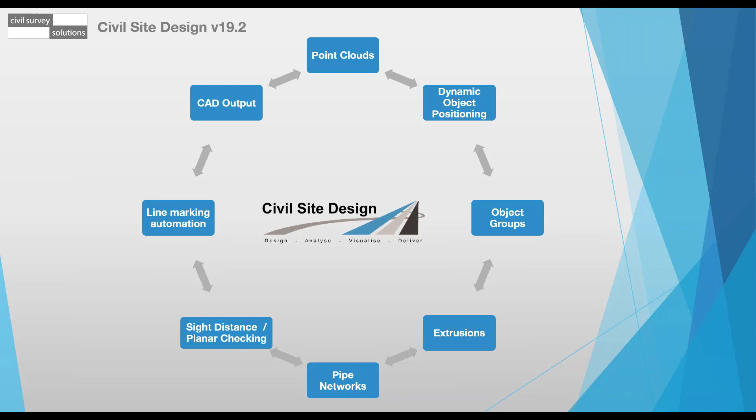Again, much like yesterday, I'll be working on civil site design sitting on top of Civil 3D, and Andrew will be sitting on, Andrew, is it BricsCAD or AutoCAD? I can't remember. I'm on Civil 3D today. You are Civil. Oh, you are on Civil 3D. My apologies. Okay, we are singing in unison then. Excellent. And BricsCAD. The last part I'll do in BricsCAD.

We're spoiling them. Okay, so really, I guess in a sense the platform isn't quite as relevant today because we're not doing too much in respect of string design, but nevertheless, at least we've got a bit of contrast between the two platforms.

So what I'm going to do is fire up Model Viewer. Now I have to remind myself whether or not I've got it already open, and I'm going to make sure I've got a clean screen for you guys. There we go, we're going to fire up Model Viewer. So this is a job that's already been worked on. Obviously what I'd love to be doing now is parking Model Viewer onto another screen and working with it there, but due to constraints we can't really work like that.

The first thing I'm going to be focusing on for you guys is objects. If you haven't used objects before in civil site design, this is a great opportunity to see how they work, but also see the changes that have gone into inserting them and how they can be used later on, which is something Andrew will show you, to actually give you blocks and CAD output within the drawing environment. What I'm going to do is pop over to the Objects tab. Now there are other additions and changes to some of these other tabs, and Andrew will talk you through some of the content, particularly in toggle display. I'm going to go over some of the base updates to things like objects, extrusions and pipes.

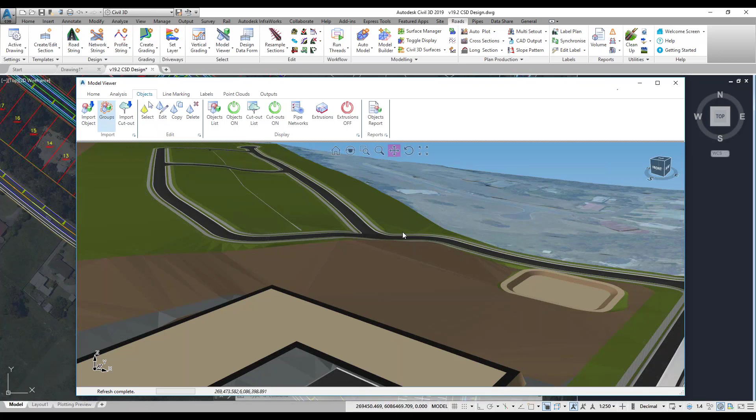So currently, if you haven't seen objects, the idea is that we are able to bring in OBJ files and have those placed within the drawing environment to give you some context for your design. Now what I'm going to do is click on the Import Object button. In fact, what we'll do is make Model Viewer full screen. And Jonathan, with the new objects, we also support 3ds files now as well. So OBJ and 3ds, yeah. Fantastic, thank you. I'm going to go to the Import Object button and just do that again. My apologies. Oh, that's interesting. Okay.

I'm going to go to the File tab. I'll mention this briefly, but the default folder location is the visualization folder found in your Common 10, and the populated content in here, particularly the signs, has actually been added to in this particular release. This has come through something called a visualization pack, which I'll come to shortly once I've shown you how this works.

The folders actually contain some of the base imagery information that goes into making up the OBJ file, so I don't really need the folders. What I'm going to do is go to the warning signs, ignore the folders for the time being, and come down and pick - you can see there's a lot of content we've added in. There's a huge sign library that the team put together to make this possible, so there's a vast wealth of signage that's gone in.

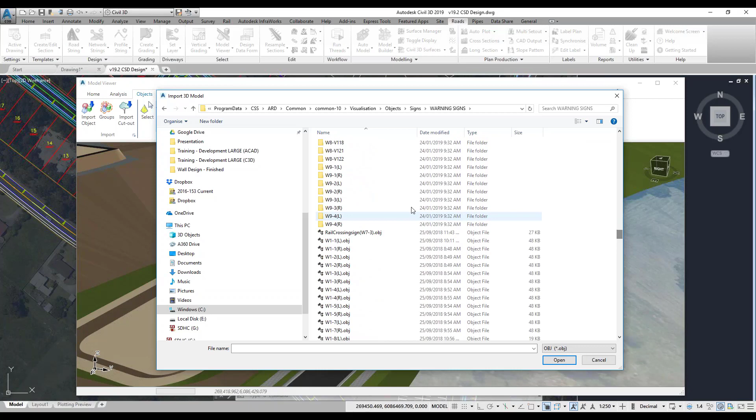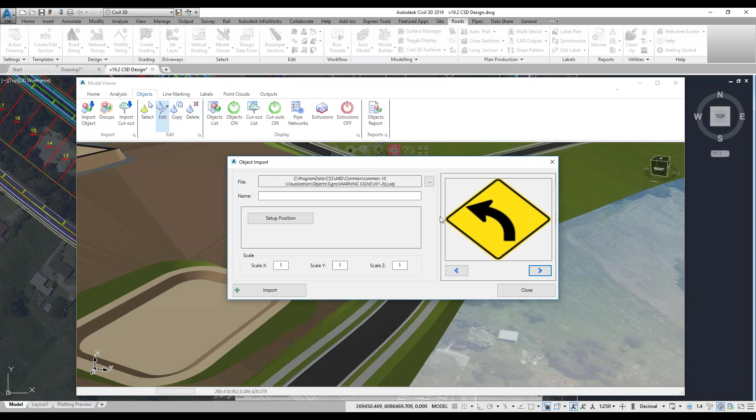We'll just pick the first sign, click on open. What you'll get is a live preview of the sign on the right-hand side. The software will actually read the folder and continue to preview other OBJ files related to that folder. So if I hit this right arrow button, as I'm scrolling through, the file path name is changing and I'm getting a live preview of the sign that I want. So what I'm going to do is just pick a generic one to fire myself through here.

Okay, so we've got a left-hand turn coming up here. Not that we'd be putting this particular sign there, warning of a left-hand turn in this subdivision, but nevertheless it's a good opportunity to place the sign in. So I'm just going to simply place the name here called sign.

In previous releases of Civil Site Design, you'd reference the location of the sign, both horizontally and vertically, based on a click in the drawing, and then a surface was referenced. Quite simple. You can still do that, but we've actually expanded the way in which it can be done.

So if I click on Setup Position, you've now got this form you'll see used in many different locations within Model Viewer. It's a really good form, and because it's such a good form we apply it in many different particular locations within Model Viewer - I'll show you that a little bit later. You can now obviously specify locations, so if you could do this before, you could go and pick a location on plan and have the software just simply place the origin of that particular OBJ file in that position in the drawing environment.

What you can also now do is reference an alignment midway between two alignments, reference a string, maybe reference a code - in fact, that's what we may do in a minute - and midway between two codes. So maybe we want it in the middle of a footpath, for example.

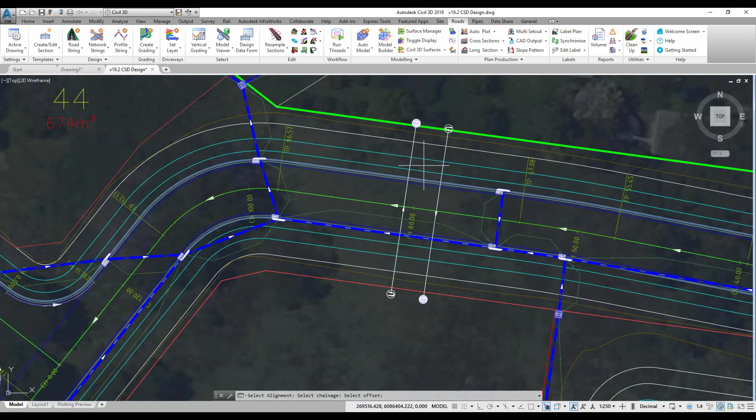We'll go offset. Maybe we'll say, in fact, you know what, reference string, we'll go code. Okay, I'm actually going to pick the horizontal - I'm getting myself sort of caught between which one to do. So what I'm going to do is just go offset. I'm actually going to just manually pick a location. So there we go, 7 meters from the center line.

Now, the nice thing about the angle is that because I'm referencing an alignment, the software should rotate the OBJ for me in reference to the actual direction of the road, which is what I want.

The next part of this is to specify an elevation, which I can type in, or I can choose a string or a code, which is what I remember now I was going to be doing. In this case, I'm going to use that - reference string code and road 1, use the level of the code RFPO, which is basically the outside footpath code.

So if I go and change that, which conveniently I'm going to do in a minute, the idea is that the base elevation of this particular OBJ will change. I'm going to click on apply and then go import. You can see the sign's gone in, based on the position where I've clicked in respect of the offset and the chainage.

Jonathan, sorry, can I just butt in there? Please.

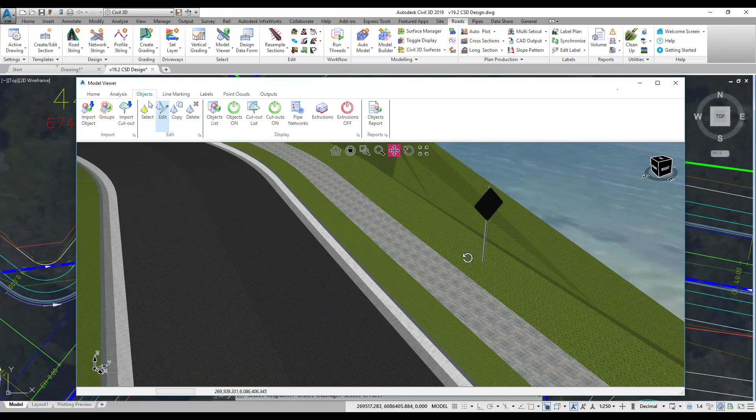On our visualization pack, there are a couple of signs that we realized were incorrect, and we're going to update it next week. And you've unfortunately picked one of the signs that doesn't have an image on it. That was so part of the plan to promote this discussion. So you want to try maybe with a give way sign or something like that.

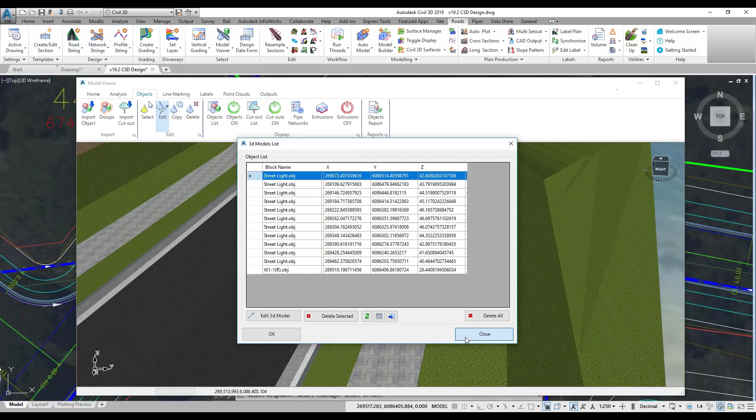Yeah, we'll go edit 3D model. Just so people know, we're supplying a visualization pack, which is a separate download of all of these signs. And we found that of the hundreds, there's a few that didn't come through properly. Maybe we'll cover that if we get time at the end, just to go through the process of adding another one. But yeah, suffice to say that a good 99% of them do actually have the actual image located on them, which is good.

One thing, the purpose of adding this sign in is also to show you how you can really use Model Viewer in your day-to-day design work. The idea being that if I, for example, wanted to, particularly with the new right-click cross-section editing, you can actually right-click on top of the string that you're editing, which in this case is road 1. You can access the

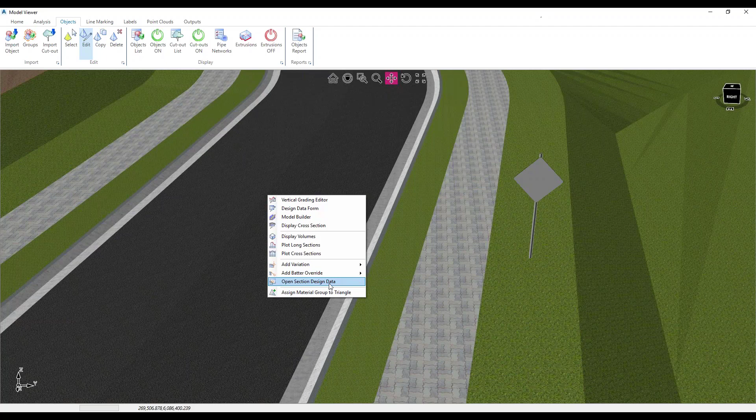design variations, batter overrides, and section data form just by right-clicking in Model Viewer. Now, very recently, since we've had this sort of being beta tested, I found myself with Model Viewer parked off to one side, and I'm accessing the strings and accessing the design data and whatnot and the vertical grading just by right-clicking in Model Viewer. It's a lot more efficient than going up to the ribbon, finding the tool, clicking on the string that you're wanting to edit. This is far quicker.

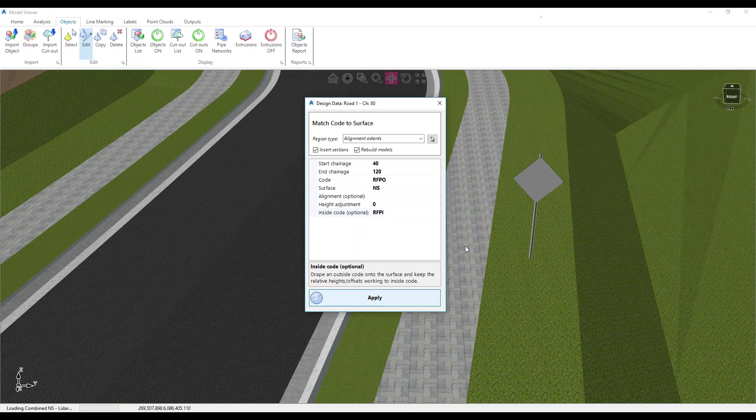and move it onto the natural surface. And I'm just going to use optional inside code here. This is basically saying keep the existing slope between the following sections maintained. So I'm going to go RFPI. Click apply. Then the idea is that this footpath should maintain its slope, but drop. So you can see what it's done there. There we go. And that object has come down with it nicely.

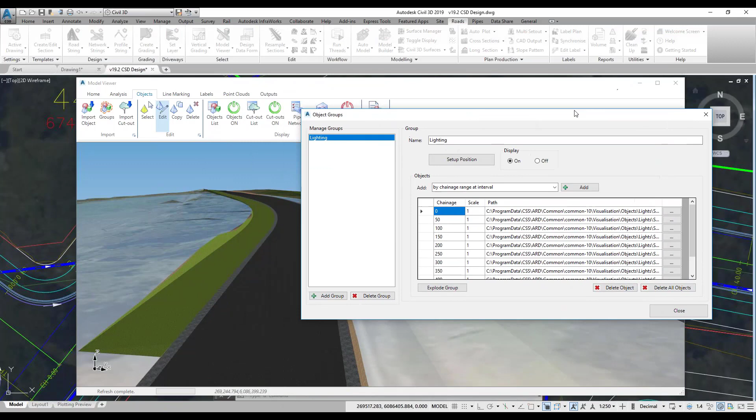So those objects are great, added in individually, but in a scenario maybe where you've got multiple different objects that you want to add in, we've actually got something called object grouping. So if I go up to the groups button, and as soon as I do that, I've already preset this. Okay, so what I've basically said is what I want to happen is for a particular object to be placed at a set interval and reported along, in this case, an alignment.

So I've basically given it a name, set up the position. This position is basically an alignment. So I'm saying, right, I want to horizontally fix the location of this street, all these street lights to be 5 meters to the left of the center line, minus being left, positive being right. And you'll actually see them the other way around because I'm looking at the alignment in reverse. And then I want the vertical position to be based on the right shoulder code. Okay, so again, if that code gets changed later on, the position of it will change.

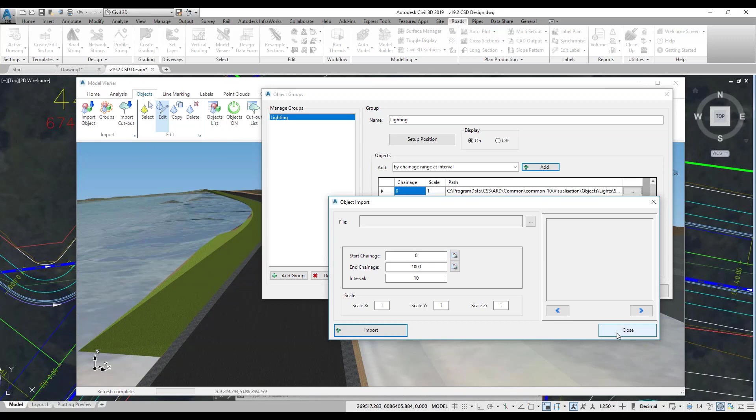We then go and decide how we want those objects to be added, and we can see here that we've got by chainage range at interval, which is what I've used, by sections, or we've got by single chainage. When we go add, it's a case of cherry picking the OBJ file, choosing the start chainage, end chainage, and the interval. Much the same way that we added the imagery, added the object for the previous solution. When we get that, we get it into a little group, which is nice and neat, puts everything together, and it means we can actually delete the entire group as well.

If I click on close, really you should be looking up the road this way. You can see that we've got these OBJs being added in intermittently within that group. Andrew will mention something about CAD output, but this is really great.

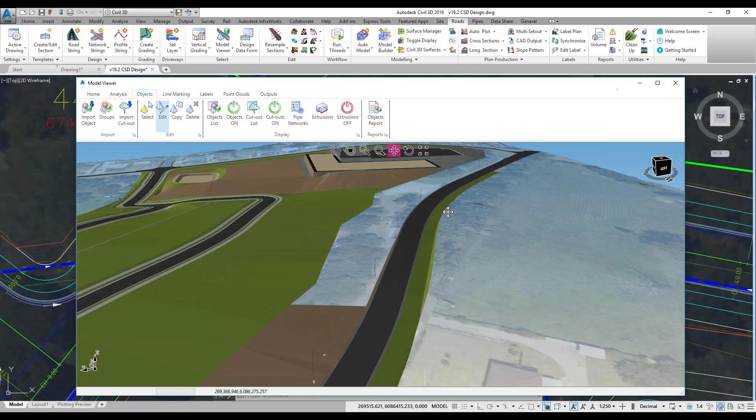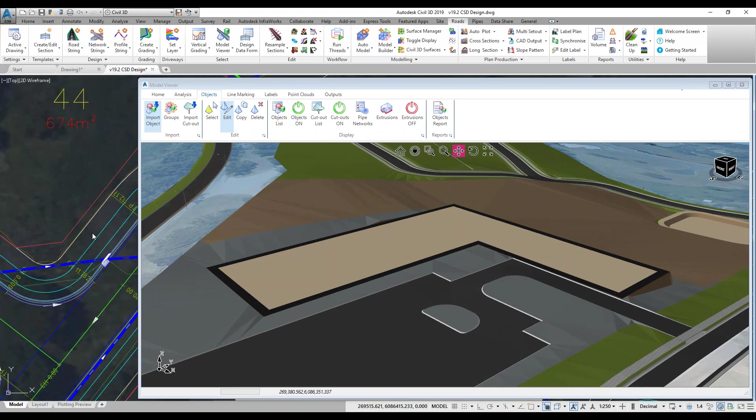In respect of further visualization and giving context, what I've got here, and you probably saw this yesterday if you're on the webcast or in the videos, is a building pad. Traditionally we've gone ahead and created a surface of some sort to give that kind of context, but you don't really need to do that anymore. What I've got in the drawing environment is a polyline.

Here she is, and I'm just going to bring up the properties so you can see. It's a polyline on layer underscore building ext, for extrude, and that's all it is. What I want is to give some context for this building, so I'd like to see that polyline basically extruded. The tool does exactly what it says on the tin and extrudes it into the drawing environment.

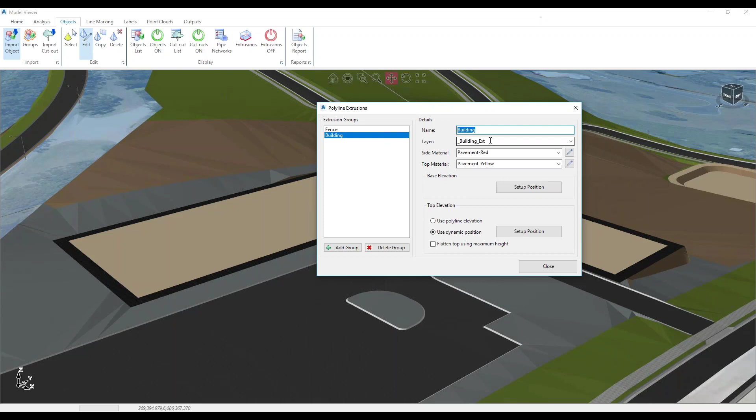So what I'm going to do is click on extrusions. I've got a couple in there already, turned off at the moment, so the one we're looking at is building. The way it works is we give this extrusion a name, nice and simple, on the left, then pick a layer on which the polyline is found. In this case, it's building_ext.

You then pick a material for the side and the top. These are materials found in your materials list. In newer releases, or the latest release of the software, we've included some building textures which you can add, or you can use the ones already in there. They're basically found in here, as JPEGs, so if you want to get your own and pop them into this folder, you can do that. In this case we're just assigning two different colors, one for the side, one for the top.

The base elevation works in exactly the same way as the positioning you've seen before. So I'm saying position the base of this polyline on a reference surface, which happens to be a grading string — and that's dynamic as well. For the top elevation, I can set a value if I choose, or say use the same surface, and in this case it's a 6 meter high structure.

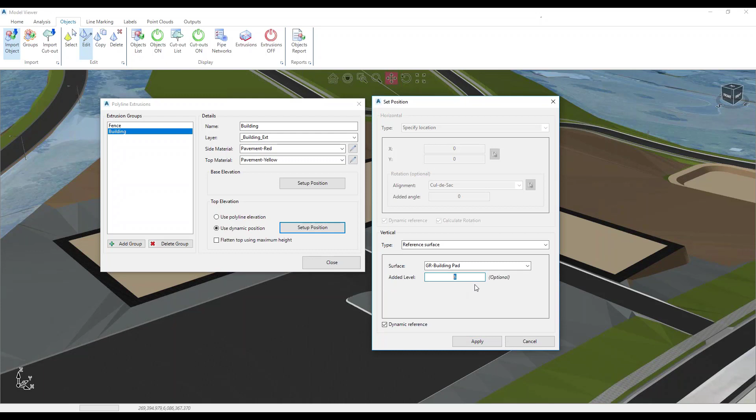Click on cancel, because I'm not going to make any edits to that. Click on close. I'm going to turn on the extrusion — these can be turned on and off visually in the drawing environment. You'll see there we've got that going on there. The great thing is I've got what should technically be sort of an acoustic barrier going on here as well, so you can use these.

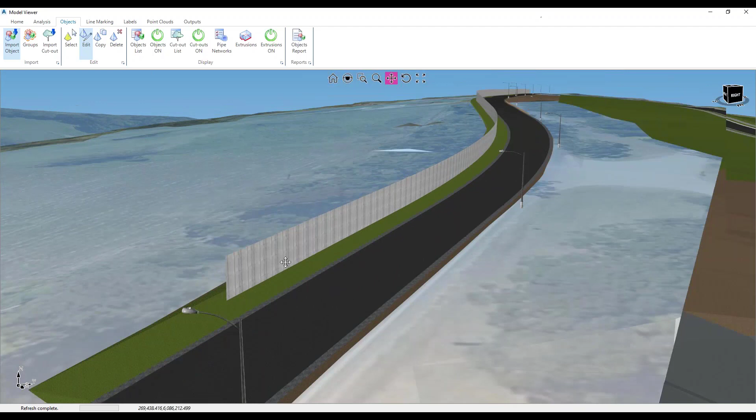Andrew will show you — these will interact with your sight distance. So it will act as an obstruction through your sight distance checking, which is very, very quick and easy to do.

Really, the last part of my presentation is just to show you the pipes. So what I've got in the drawing environment is a pipe network which I've created. I've got a couple of services in there as well, just for a bit more context. What we'd like to do now is simply see these as solids in the 3D environment in Model Viewer, so we're going to go to the Pipe Networks tab.

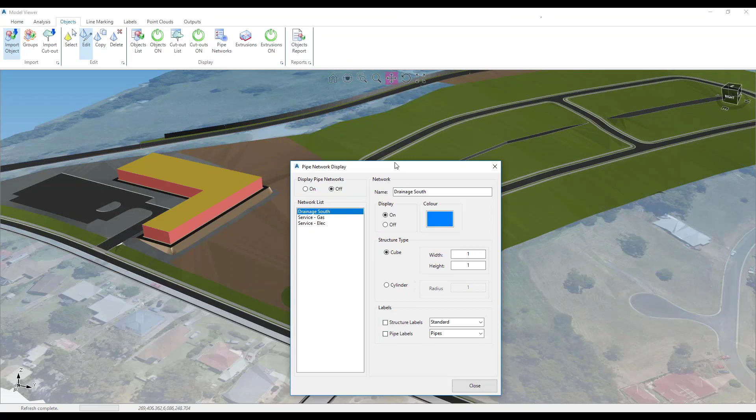In there we've got a few different networks. When the software enters these, you'll see them as Network 1, Network 2, Network 3, regardless of the network name you've provided. So I have renamed these, but we offer you the chance to do that and provide different colors for your individual networks, and also label the networks if you choose. So I might just put on a pipe label here for the electric. I'm going to turn these on.

One thing you need to do before you run this is make sure you have at least opened up part of the network you're displaying in the vertical grading editor. This just gives the software a chance to check everything and make sure it's running as it should before you display it in the Model Viewer environment. You might get a slightly different result if you don't, but as long as you open it up in the vertical grading editor, you'll have no problems.

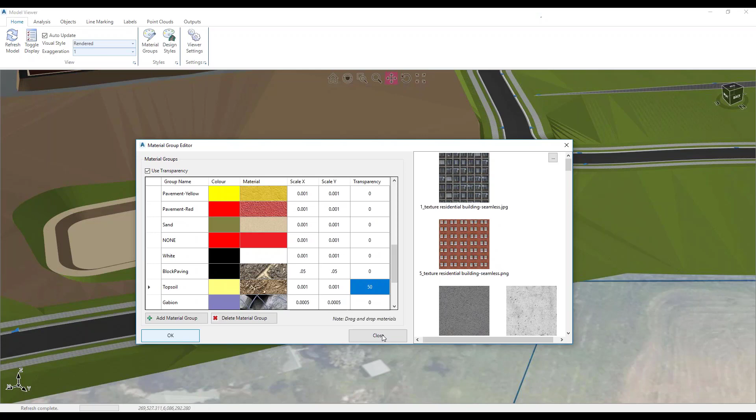Now what I've ended up with here is pits and pipes, which you can't really see. So what I should have done was apply some material transparency, which I'm going to do now. Normally I have transparency all set on these, and then I just uncheck use transparency and turn it on when I need it. So we'll go down, there's another one called topsoil, click OK, give this a second to work its magic, and we should be good to go. There we go, I've basically just gone through and made those transparent.

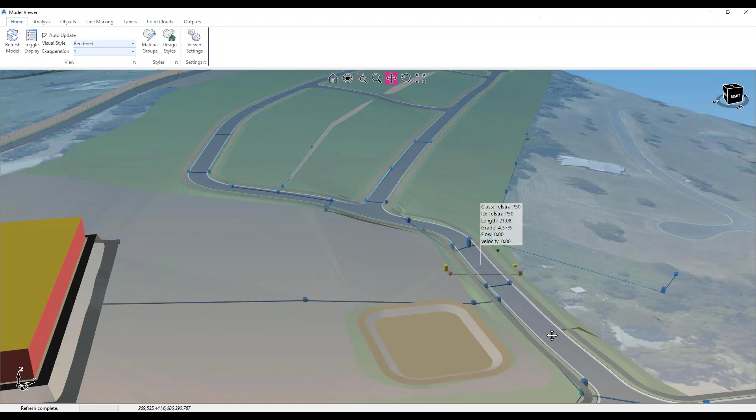You can see there how we've now got a very neat little way of being able to add in and give some context to your pits and your pipes. Again, this is the first stage of development of this particular tool, so this is just the first pass. It's only going to be improved and made even better than it currently is.

Now Andrew, have I missed anything there? Is that in respect to the pipe? You can see there the label.

I think I can probably hand the presenting to you.

Yeah, thanks Jonathan. As Jonathan said, we're going to be doing a lot more work with Model Viewer, and we're looking to export and import IFC files as well. So that's sort of where we're heading, seems to be where the industry is going towards - more model-based, IFC, BIM, all that type of thing.

Okay, well Jonathan, can you see my screen okay? I can, yeah. Loading now?

Yep, cool. Okay, so look, this version of Model Viewer in 19.2, we're sort of calling it Model Viewer version 2, because there's been a lot of work done on it and a lot of rewriting of Model Viewer to make it run a lot faster.

You will notice it's a much faster engine. When you display a design in Model Viewer - I'll just quickly open up Toggle Display - what you're doing is telling the software to trim the design out of the base surface, cutting holes in the base surface where the design exists. In the previous version that was quite a slow operation. If you had lots of dense triangles, that operation for cutting surfaces into the base was quite slow. We've developed that engine and it's a lot faster now.

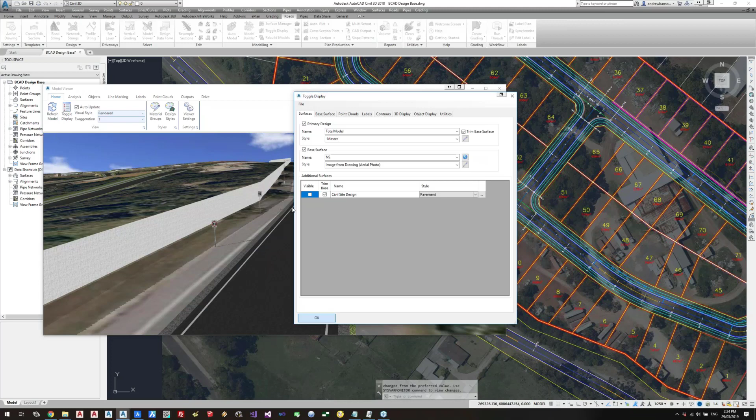Okay, so let's talk about the new features, and I'm going to start off by showing you sight distance, because sight distance we have basically rewritten. If I go to the Analysis tab and click on sight distance, this is what the tab looks like now. Previously, in the older version, you would just pick a road and you could only do sight distance along the road. What we have now is the ability to calculate sight distance anywhere using referencing different strings or surfaces.

And you set up the sight distance using a sight distance table. So I'm just going to open up Manage Tables here. This is what the form looks like, and I have set up two tables on the left here for this particular road. Now this is an 80-kilometre-per-hour road, and I've set up a sight table for the forward and reverse directions. So how it works is you give the sight table a name, and you can also specify an associated string.

Now, when you calculate sight distance, for example stopping sight distance, the software will take into account the vertical geometry. So if we're going uphill, then there's a correction on the sight distance, a negative correction. And if we're going downhill, the software will increase the sight distance to account for braking and all of that type of thing. That's all set up in the styles that come with the software.

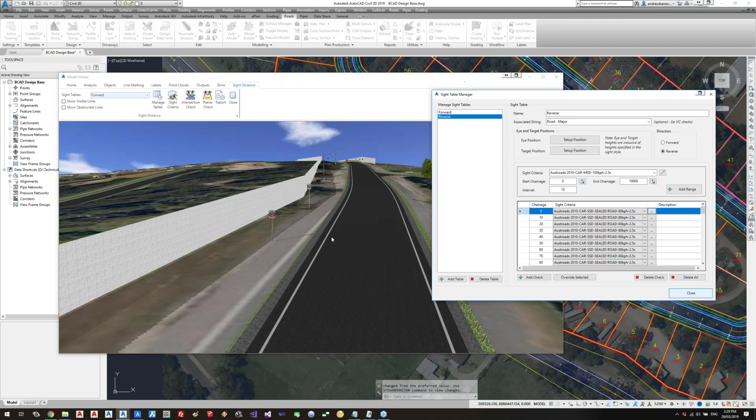So if I wanted to show the results for one of those tables, I simply tick on show visible or show obstructed. Generally I'll just turn off show visible and show obstructed, and then I can change that to forward. You can see the results for the forward direction. So when I automate my line marking later on, we should have barrier lines through this region. We'll check that out.

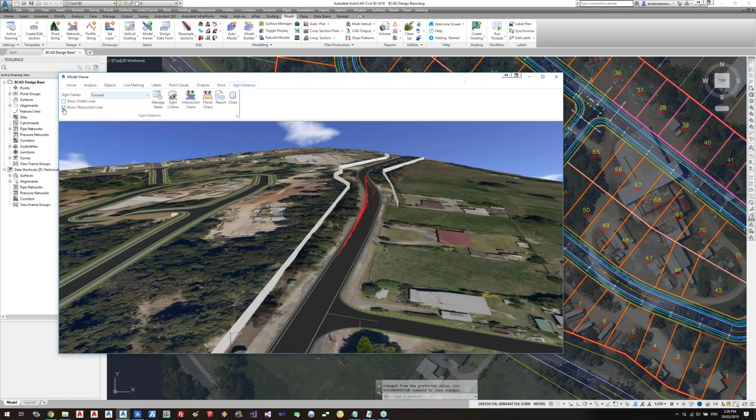Andrew, would it be possible to just make that full screen? Would that be okay? Yeah, thank you. A bit better? Yeah, brilliant. Cool, okay.

Now I might as well do an intersection check. We've also improved the intersection check - it now uses a similar sight table. In the previous version you could only do one intersection check, and now you can create a sight table for all the intersections in the job.

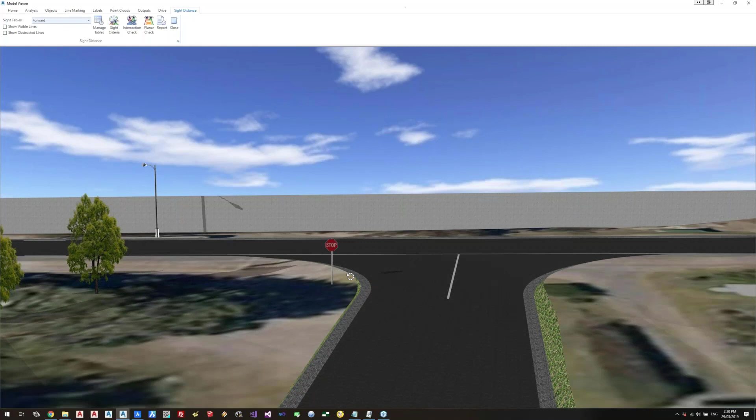I've actually got one set up for this intersection, so I'm going to click on the intersection check icon here. This is where we set it up - it's actually very similar to the last version. However, in order to position the vehicle and where we want to do the check along the road, we use that position class that we've been showing you.

In this case, I position the car using the position class, and I've said, along this side road between centerline and LEB, at this chainage is where I want to position the car. Then looking to the left, I'm looking between the centerline and LEB of my main road, and looking towards the right, I'm looking between the centerline and the REB. The sight distance comes from the style, the criteria style that I pick here.

Let's make that full screen. The intersection checks will also appear in this table here. So if I tick on, say, show visible, you can see the results for that sight check. Now my sight check is all good for this intersection.

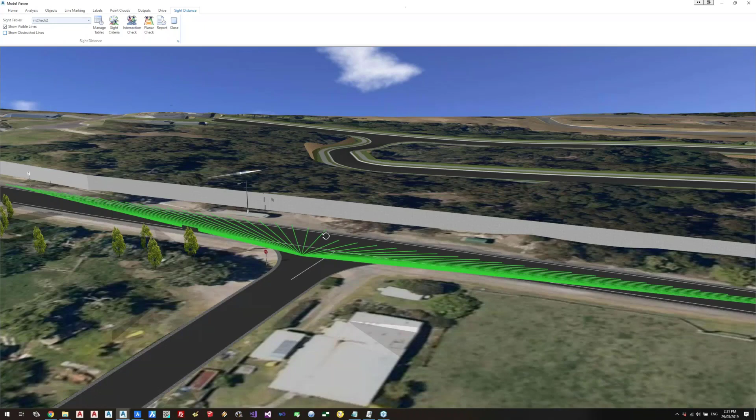If I click on report, we get a nice detailed report showing the results for each of those checks that we've done. One thing I really like showing people is as you click on an entry in the report, and the entry is essentially a sightline, what we do is we show a yellow ball indicating the target. This is taking the parameters from the sight style - the distance away is the sight distance, and the height of the ball is the target height.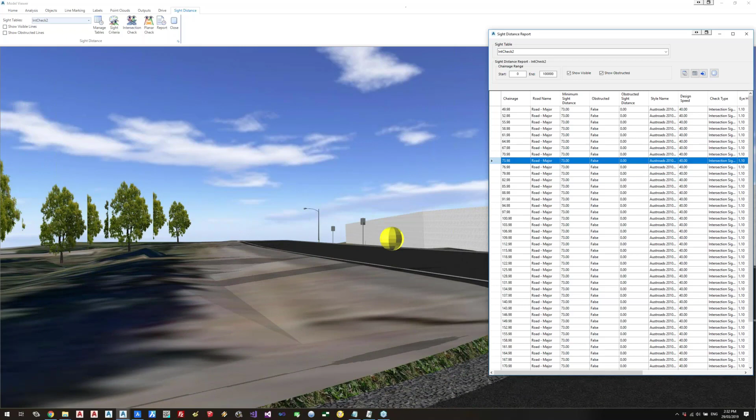It's sort of like Pac-Man mode. As I skip through the entries here, you can see that ball moving along the road there. I like to call it Pac-Man mode - we need to have some Pac-Man noises on this command, I think. But it's a nice visual check as well, checking to make sure that you're getting good sight distance at an intersection.

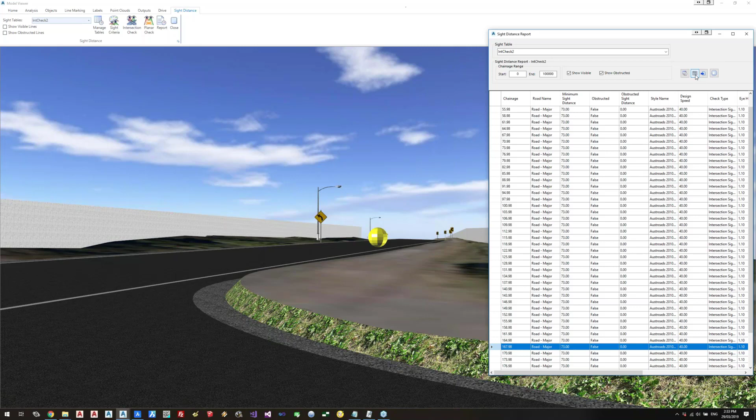This road being a 40-kilometre road, it could curve - there might be a horizontal curve just up around here. We'd be able to review the results quite easily using this report. This report can be outputted to a table in the drawing or an Excel spreadsheet, so if you needed to prove the results to someone, you can. There's options here to output to AutoCAD table or export to a file.

Now, as Jonathan mentioned, the addition of extrusions is really useful, not only for showing buildings or other structures in Model Viewer, but for using extrusions to calculate sight distance. So I'll just turn on my sight distance lines again - that was for maybe the main road.

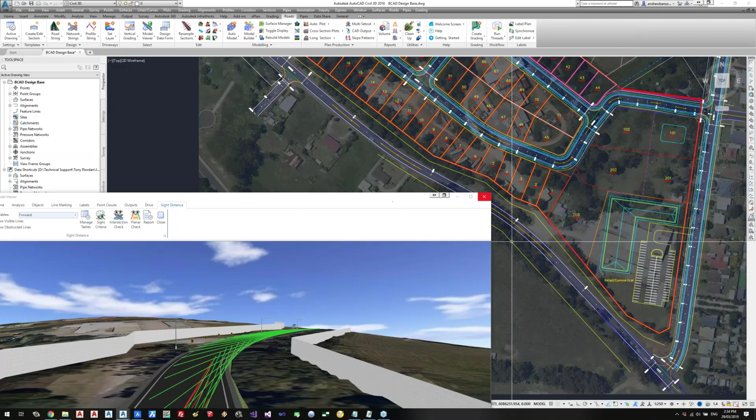I'm just going to do something really stupid here. This is an acoustic barrier wall - I'm going to move the polyline across the road and refresh my sight distance. I'm just going to pick this polyline and move it, and I'm going to rerun my sight distance.

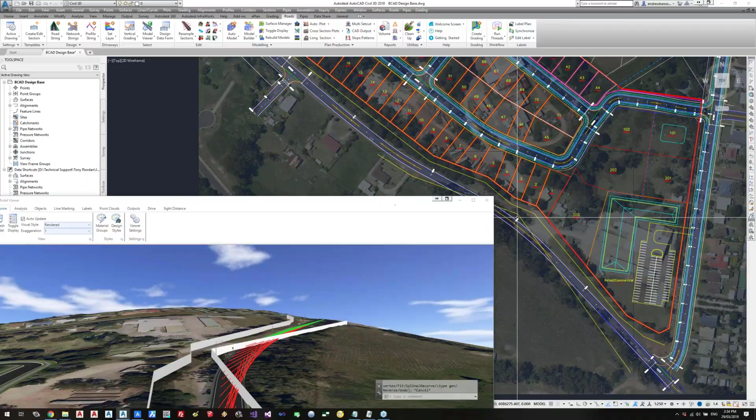Now you can see there that I'm getting a whole bunch of red because the software is also detecting against that extrusion. So the extrusions are also good to create a corridor of maximum sight that you would check off the road as well. But there could be other reasons - you might have some sort of overpass or something, and you want to check the sight lines against the overpass. There's lots of uses for it, but I think that's a pretty cool addition to the software.

In fact, the sight distance now takes those into account.

Now that we're in 3D, we have added a new way of calculating sight distance. Rather than the traditional point-to-point draw a line sight check, which follows Austroads guidelines, we have created a new planar check, which for 3D makes a little more sense.

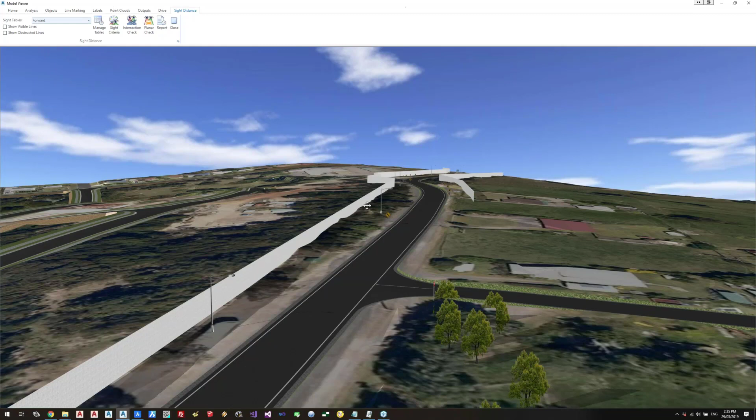The idea behind it is you pick a sight table that you've created and you create a plane with a simple width and height dimension. The software will calculate the percentage of visible area on that plane. Let me show you how it works.

If I click on planar check, pick the sight table, specify the height of the plane, and then perform the check. This would be good if, say, you had a pedestrian crossing or a school zone, and you wanted to make sure the driver could see the crossing and see pedestrians about to enter. It gives you a more visual check rather than the point-to-point line.

So I click on Perform Check, and you can see it's using all the values from my sight table. It's positioning the plane at the sight distance and the dimensions I've plugged in. Then in the table, it's reporting the percentage of visible area of that plane. There might be certain areas where we may only see 50% of that plane, or maybe none at all.

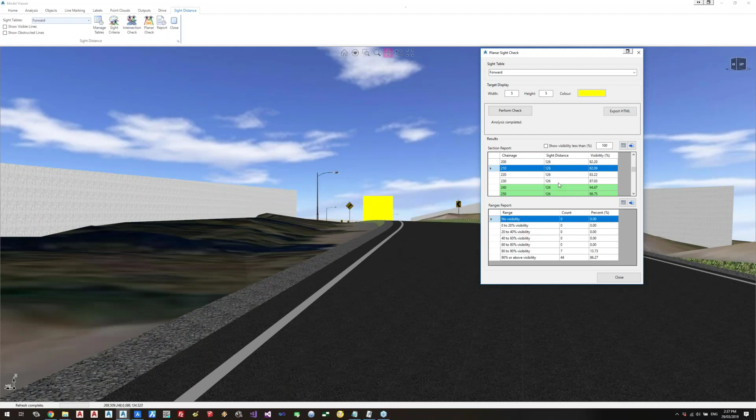Okay, so that's almost finished. If I go back and click through this table, you can see the sight check updates, and you can see where I'm getting 83%, 82% visibility. You can filter the results here based on the visibility percentage.

So I could say, show me anything less than 90%, for example. You can export this report to a table, CSV file, or HTML file. If I click on Export HTML, the software outputs HTML for each of the sections in this table, though mine have been filtered a bit. It displays an image with the plane and details the results for that sight check.

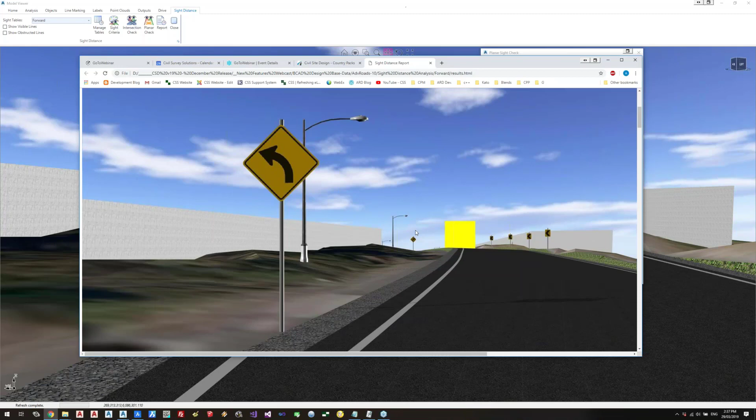I think it's a pretty cool method of doing a sight check. It's another way of making sure your road is safe, with no issues, but it's very simple to do. If you've got a sight table, you can see how quick it is to go and run a planar check on that. It'd be interesting to get people's feedback on whether they would use it or not. But as I said, because we're in 3D now, we can do these types of analysis.

Okay, so we've got the sight table. What I'm going to do next is automate the line marking of this center line using the sight tables. If I head across to the line marking tab, you'll see we've got a whole bunch of extra commands: one called lane styles, one called length rules, another called marking overrides.

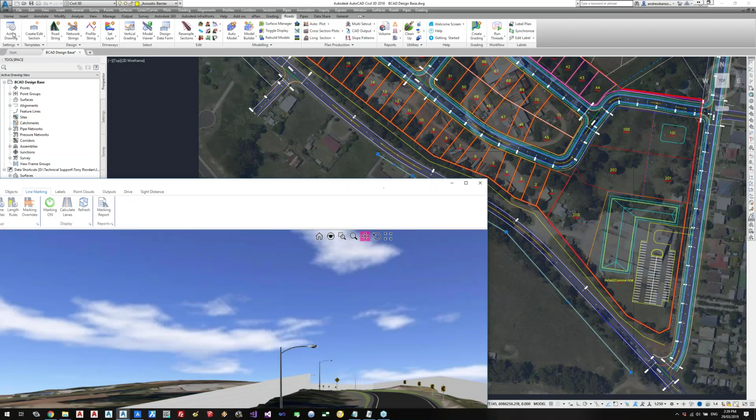I'll explain what each of these do, but before that I might just go ahead and automate the line marking. If I click on marking setup, it works exactly the same as the form was before, except we now have this extra tab called By Lane, and this is how you use this new automated method.

We've set this up for multi-lane highways, so you could create the line marking for multiple lanes all in one hit. In this case, I'm just going to automate the center line of this road. So I click on Add Line, and this will be the center line of my road. Once again, we use the position class.

In this case it's to position the line marking, so I just want it at the center of my road, and the levels I want from the total model. Apply. Then what I need to do is pick a sight table for forward, a sight table for reverse, and a lane style, which I'll explain in a sec. At the moment both sight tables are forward, so I'm going to make one reverse, and then tell the software to compute the lane line marking.

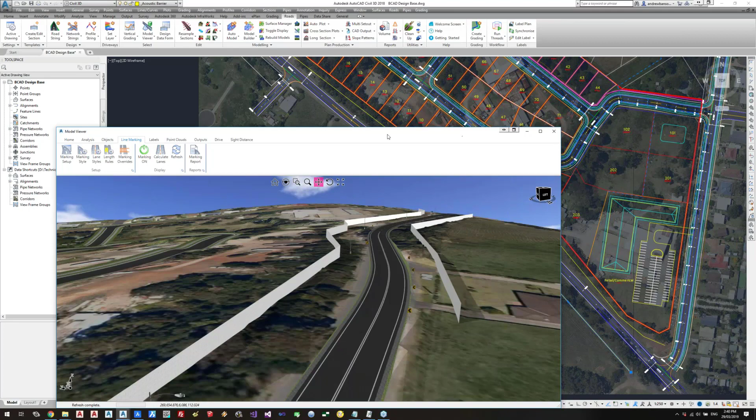So if we have a look at the road, zoom back in here, you can see we've got a broken dashed line, but as we get to that area where we've got the side obstructions, I have the barrier line marking.

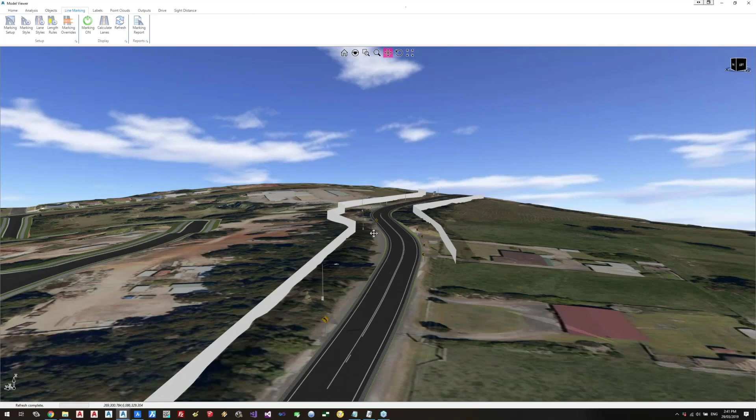Okay, and then we go back to dashed line. Now, there are a whole bunch of rules that you can set up and customize that the software will use to automate the line marking. So as part of Austroads or other standards, you have minimum length of barrier line marking, and minimum length between barrier line marking, which you can set up. Those minimum lengths are based off speed.

Let me just quickly run through. If I click on length rules, this is where you can set up the barrier lane length rules. Now I've just got mine all at 0, but I think we might have a standard already set up in here. If I just go to standard style, you can see for different speeds, I have a minimum length of barrier and a minimum length between. I'm pretty sure this is Australian standards.

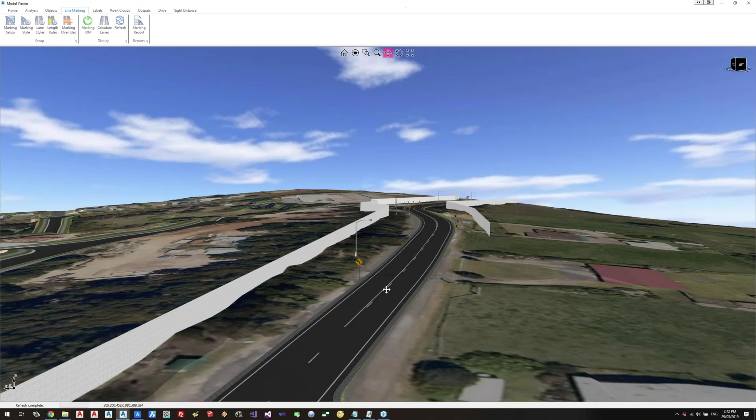Sometimes the regions don't transition nicely, so we also have an automatic region adjustment, just so the line marking, say going from dash to double, happens nice and smoothly. If you're not happy with the line marking, you can try the automatic adjustment and recalculate the lanes by clicking the calculate lanes button up top. So I actually get a different result now that I've used this speed table that indicates minimum length and minimum length between. It's a bit more realistic now.

But you can play with these numbers and save your own styles if you like. So in order to determine whether we're putting in barrier or dashed line, if there are obstructions occurring on our sight distance, all that happens using lane styles.

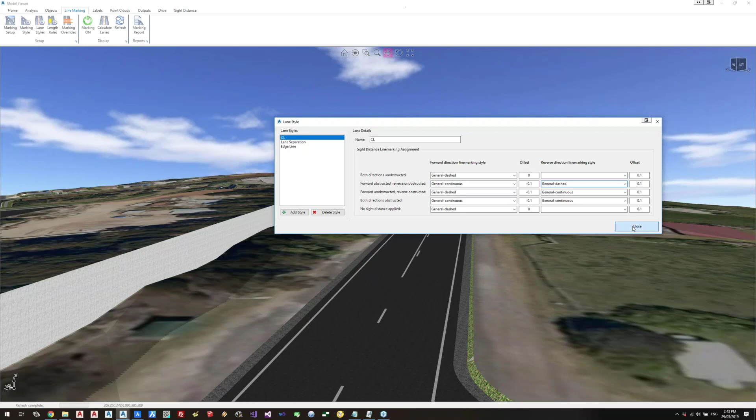I won't spend too much time on this, but you'll get the idea quickly of how this works. So I applied a style called centerline, and all it's saying is if both directions are unobstructed, then we just want a general dash line. If both directions are obstructed, then we want continuous line marking, and you can see we're setting the offsets for those. If we've got forward obstructed, reverse obstructed, these are the styles we want to apply. So it's pretty simple, but once this is all set up, you can see how easy it is for the software to automate that line marking.

As you'll see later, anything that we calculate in Model Viewer, such as the line marking or the sight distance, we can export back into AutoCAD as well.

Now, the final command on line marking I wanted to show you is marking overrides, because along the road there might be driveways or other side roads or whatever, and we want to break the line marking up, maybe remove it between a certain region, or where there's an intersection, or even replace the line marking. Maybe you're not happy with the automation and just want to say, from here to here, I want to override the line marking with something else. You can do all that with marking overrides. So let me just show you how it works.

I'm just going to open up marking overrides and add a new one. How it works is I select my road and create a corridor, a search corridor off this road, and the software will search for line marking and only apply this override to line marking it finds. So for example, if I wanted to just override the center line marking and not the edges, I put a shorter search offset in. If I wanted to override by including everything, I would increase that to maybe -10 or 10.

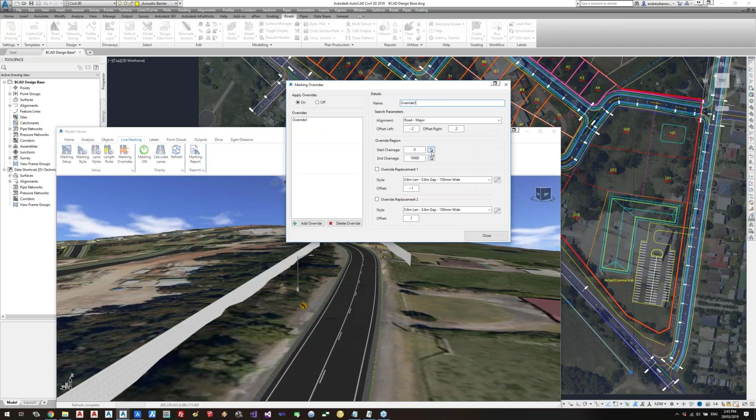So I might just call this one override 1. And I don't want to override everything, so I'm just going to pick a chainage range, maybe through here, through this curve. I'll explain the replacement later. If I close this, you can see that this is my line marking override, so I've got no line marking there. As I said, it could be a driveway or an intersection or something there.

The other thing you can do is actually replace the line marking in that region. So maybe instead of having nothing, I want to put in some dashed line marking. So let me just go to dashed, pick an offset, let's just go offset 0, and close. All right, so let's do something a bit better than that.

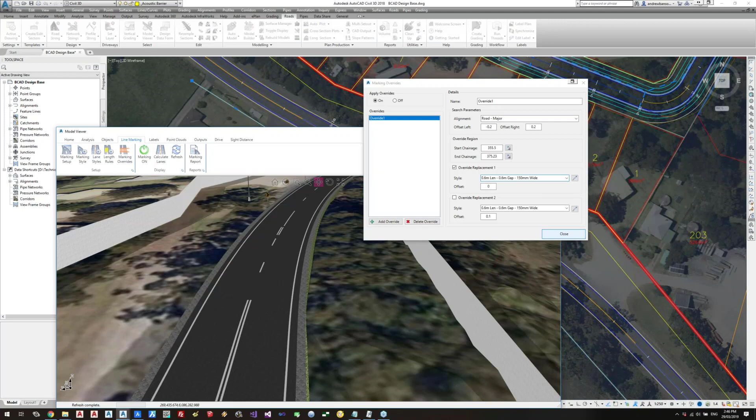You can see not only am I able to cut out and wipe out parts of the line marking, but I can also replace it with different types of line marking. I think it's important that when you're automating something, you give users the flexibility to change it if they're not happy with the results, and that's really what the marking overrides allow you to do.

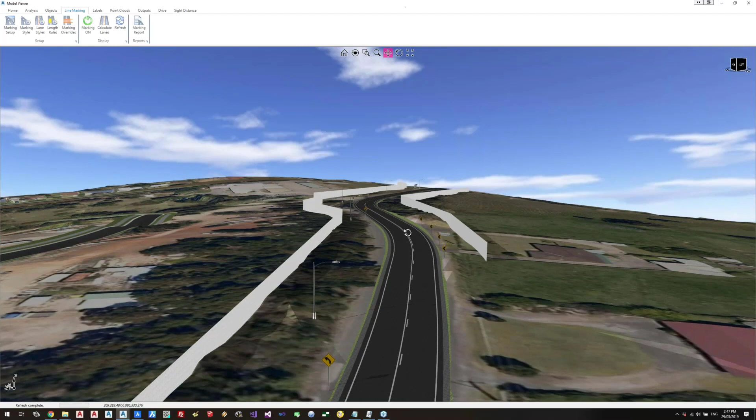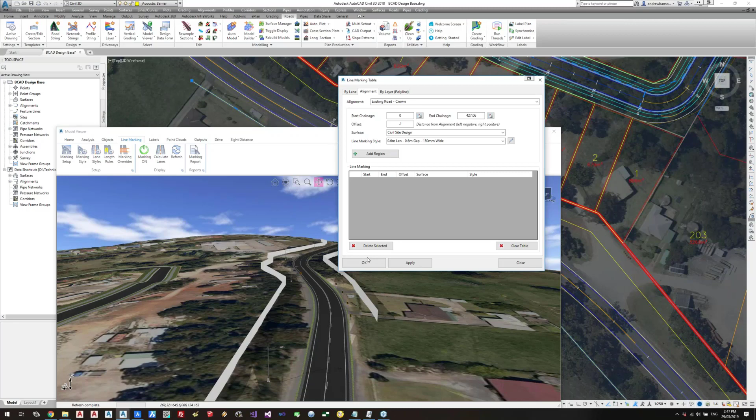All the reports are still the same. If I click on marking report, we can get linear lengths of line marking for all the different types that's been calculated. There's also an option, if you want, to essentially explode this line marking so that it becomes the standard alignment-based labeling, which you may have used before in the previous version. That would give you a bit more control over the styles and the regions.

Let's have a look at CAD output. When I go to the Outputs tab, we have a command called CAD output, and what this allows you to do is take objects such as the line marking and push them to model space as CAD entities. You can do this for line marking, sight distance, and 3D objects. I won't do it for sight distance, but those green and red sight lines you saw could be output as lines in AutoCAD.

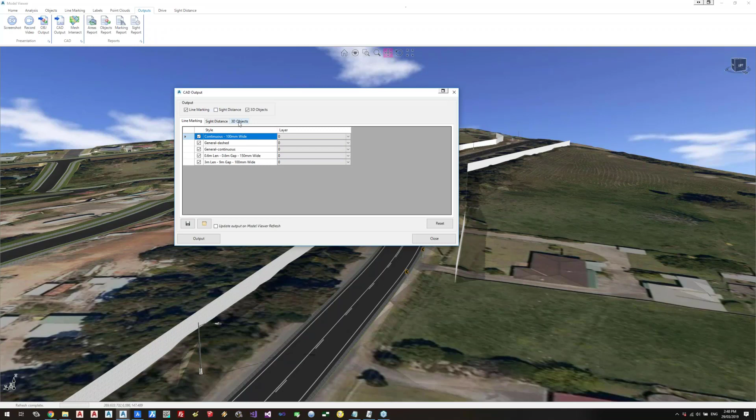For the line marking, for each of the different styles, you can preset a layer. Now for the objects - Jonathan earlier in the session was showing you object groups. I've actually got three object groups set up: one for lighting, one for signage on the left side of my road, and one for signage on the right side of the road.

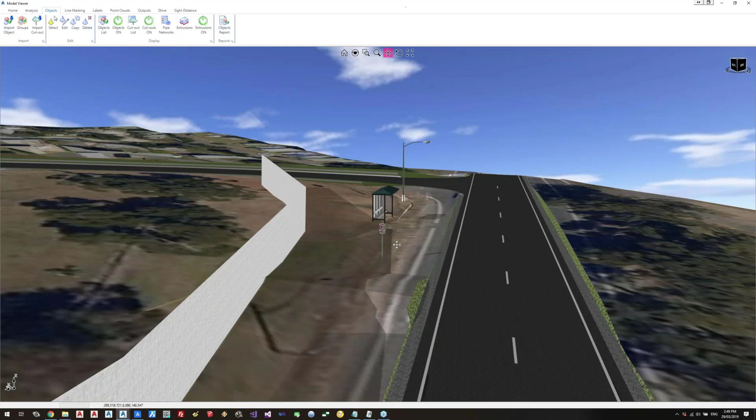If you have a look, these are all from the Australian Country Kit. I've got curve warning signs, curve hazard signs displaying, and at the start of the road I've got an 80 kilometre speed sign. As part of the Country Kit, we also have an AutoCAD block version of each of those, which means if you add signage in 3D, you can use CAD output, and it will position the AutoCAD version of that in model space.

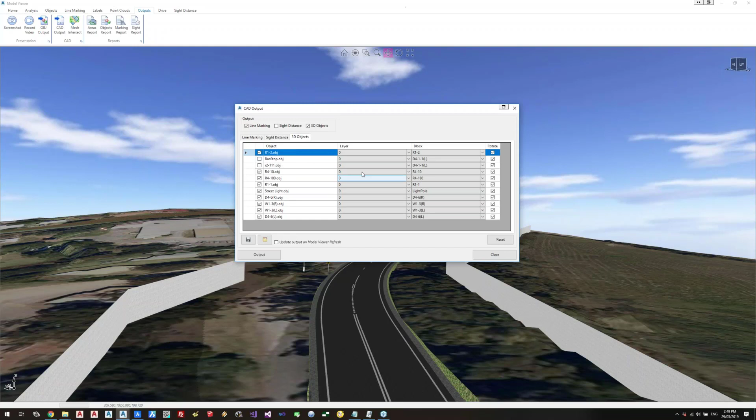So let's go back to CAD output, and I'm going to go to the 3D Objects tab. It'll actually assign the AutoCAD block automatically for you. So what we're looking at here is a list of all my objects in 3D, what layer they're going to be created on in CAD, and their AutoCAD block version. There's actually a folder in Civil Site Design that stores all these blocks, and if it finds an associated block, it'll automatically assign it for you. So you can see my street lights are getting the light pole, and for all my other signs I'm getting the CAD version.

The rotate option means the software will automatically rotate that CAD block to be the same rotation as our sign. If we didn't want to rotate the blocks in CAD, we'd just tick that off. So if you created your own objects and want certain things put on a particular layer, you can save this whole CAD output as a style and just reopen it whenever you want to use it - so you do have that flexibility.

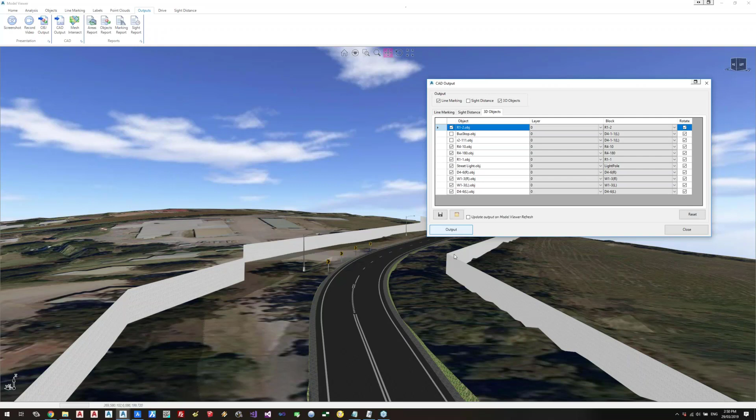So if I click on output, and just go back to CAD - let me explain what we've got here. Firstly, we've got our line marking, so I've got my edge lines and my center line all appearing in model space. I also have blocks for all the signs that I created - I've got a give way sign up the top there, a stop sign, and then I had an 80 kilometre sign at the start. I think it's pretty cool that it does that.

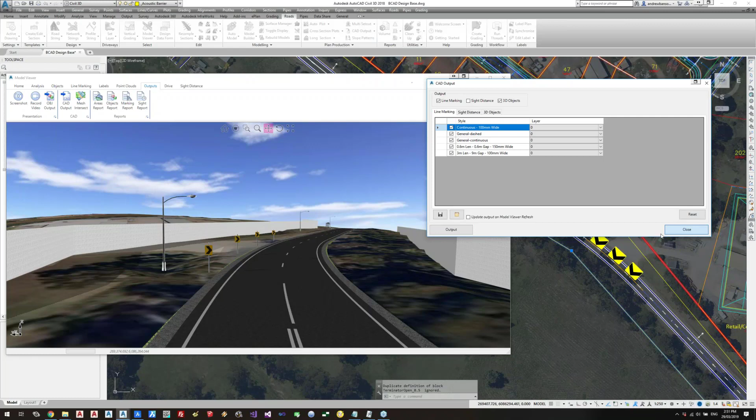The other thing is, if I was to move this road, because all those objects are dynamically referenced off the road, all of them will update, and we can also set CAD output to automatically update when we click refresh. But if I did make a change, I could just select output and it would re-output all my blocks and line marking back into CAD for me. Cool, and you can see the lighting that I have there also.

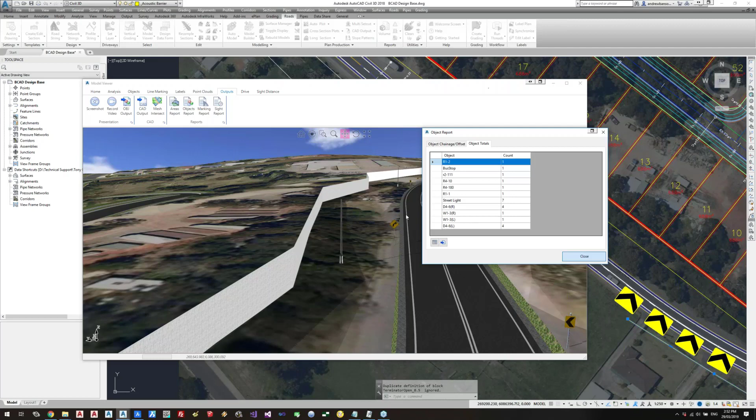So another good summary of the objects we've created in Model Viewer. I guess what we're trying to promote here is Model Viewer is more than just a visualizer. You can use it while you're working on your design, you can use it for analysis, and you can use it to save time creating the line marking and blocks in the drawing. As you saw, Jonathan at the start of the session was using it even for design.

You can add variations in here now, override batters, and this section design data form is really fantastic.

Just to give you an example, often when we do tech support and we're reviewing people's jobs, sometimes the design data form variations list can look really, really long - it can be 50 plus entries. What this does is list just the variations, the edits happening at that section. So it's going to make life easier for us doing support, but I think it'll make life easy for you too in order to review what's actually happening at a particular section.

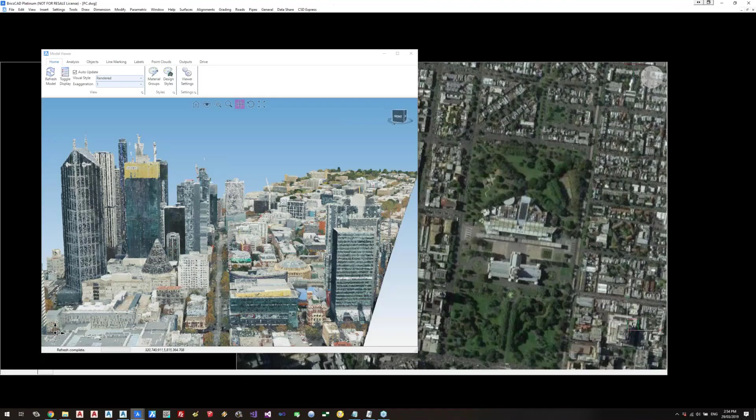So that's Model Viewer. There was one last thing I wanted to show you - it's really just a very quick demonstration of the new point cloud functionality. And I've just switched to BricsCAD.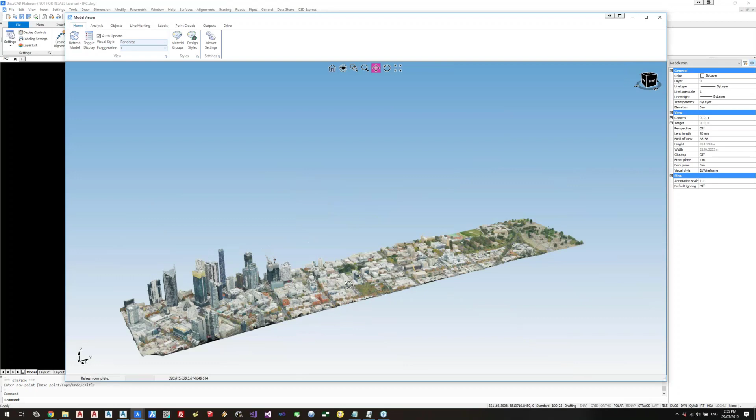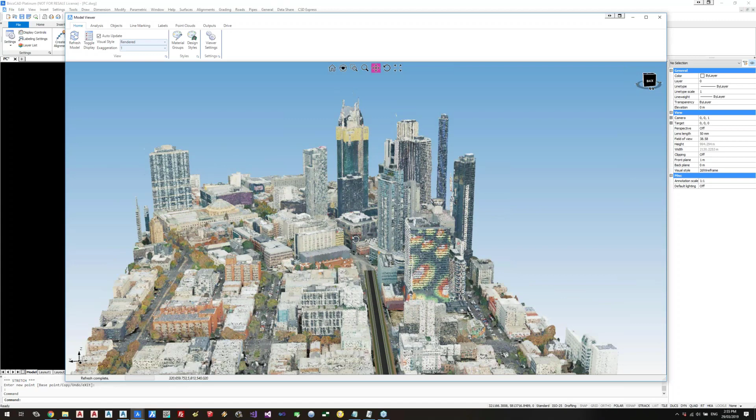You can see I've only picked a few tiles, maybe 4 tiles of a point cloud, and it's brought them into Model Viewer. It's probably going to be a little hard to tell over the web, but I can rotate this really, really quick - this is really fast. It's coming out pretty well, Andrew. I'm just flicking my mouse around, and you can get the idea of just how many points are in here because of the detail as I pan around the city area and whatever.

Now let me just show you the settings behind that. If I go to the Point Clouds tab and click on Setup - previously we allowed for the import of point clouds, but they were only black and white, and only ASCII files. Now we support LAS files, which are quite common. So you can see here I've just added a few tiles from the Melbourne point cloud data set that I found. But there's some really cool utilities that we've added.

Let me just go to the settings and show you those. Firstly, you can set up the display of the point cloud. Mine's set to color because this point cloud was colored. We do have an option, if you come across a black and white point cloud, of draping an image over the point cloud, and that brings it to life a bit. There's some other options here too.

If you checked out our webcast from yesterday, you would have seen that we've added some intelligent simplification tools to surfaces. Well, those similar tools apply to a point cloud. You might want to bring in a point cloud to review your design, check things out or whatever. That point cloud might be quite dense and you might just want to simplify it down a little bit. So we've got simplification tools. We've also included, it's probably my favorite option, the ability to create a surface from a point cloud.

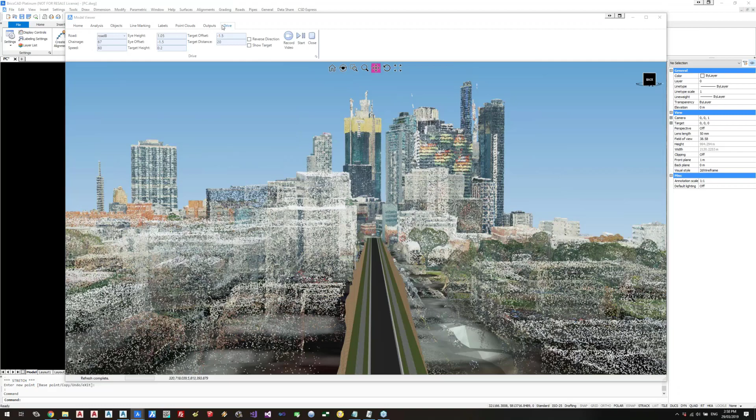Let me just do a drive along that. Right, but you can see it's filtered out points from the point cloud where that surface exists.

So yeah, I think point cloud's pretty amazing technology. It's getting better and better and better. And the cool thing is a lot of this data is being uploaded and available for free. There is a website you may or may not have used before called Elvis. It stores point cloud data all across Australia, black and white, but as I said, you can bring it to life by draping aerial images over it.

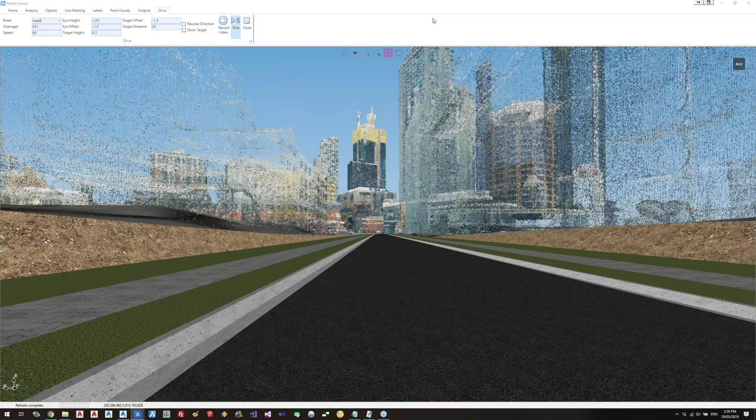So yeah, this is sort of the final thing I wanted to show you. I guess the thing to remember is that these being new feature webcasts, we will be doing more detailed web sessions soon on particular commands and maybe job-specific webcasts, so you can see how the new tools can be used for certain projects. Cool, well that's enough for me.

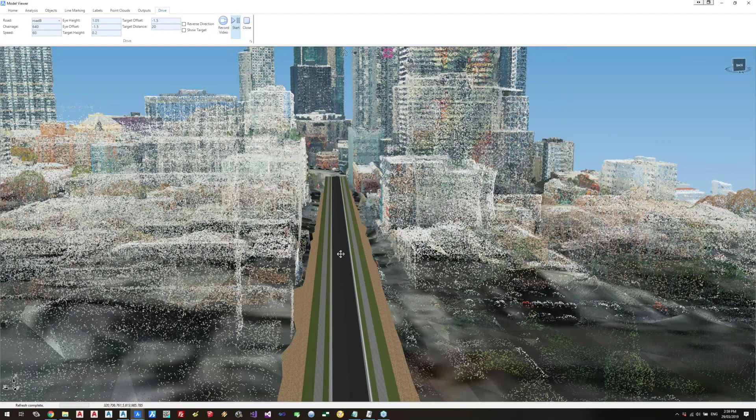So, Jonathan, you want to take back over and share your screen if you like? Well, actually, no. The only reason why I'm not is because I think one of these questions might be - we've actually got 3 questions we can certainly answer in this session. Got a couple we'll probably have to answer outside, they're going to be more directed at you. The first one was... Go easy on me. Go easy, all right.

Well, first one's from Lilac saying, you've mentioned that you can import 3ds Max files. Is there a limit, or does the new engine handle big models made up of millions of polygons?

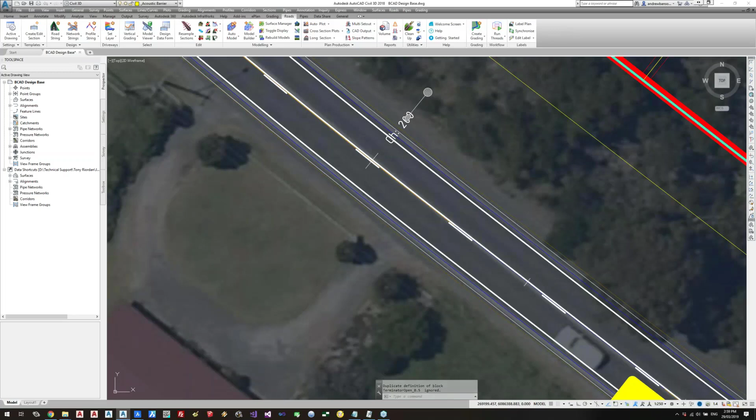Yeah, so this new engine supports file formats OBJ and 3ds, and we are looking at the moment at IFC as well. So the aim is to support a whole raft of 3D model types. In regards to large models, we are doing some stuff to allow you to bring in quite large models and still be able to rotate nice and quick, and use Model Viewer without any lag. Under toggle display, we have this new option under 3D display called large model mode. It is beta, but if you were bringing in millions and millions of triangles, you could tick that on, and you would notice that the viewer performs a lot better.

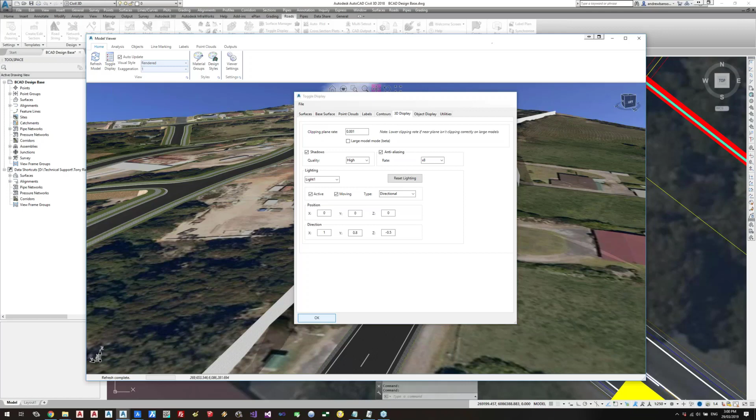So yeah, you can - this viewer can support quite large data sets, and even with the point clouds you saw, I was rotating millions of points. I think the maximum I brought in was nearly 20 million points, and usable - I could still rotate around the viewer fine. So this version of Model Viewer is much quicker, with upgraded engines, and all of it's processed off your graphics card. So the better graphics card you have, the better results you get in the viewer.

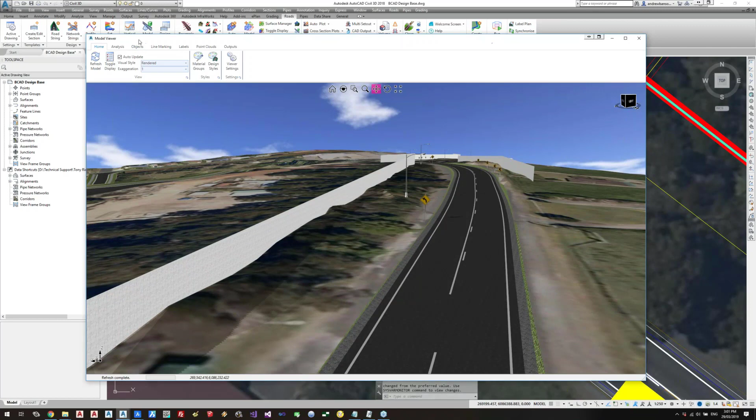Thanks for that, Andrew. The other question was actually in relation to the cloud background that you've got on there - where's that come from? How's it being applied? Is this a new feature? This is the point cloud. No, sorry, the actual clouds and sky background. Oh, okay. Yeah, okay.

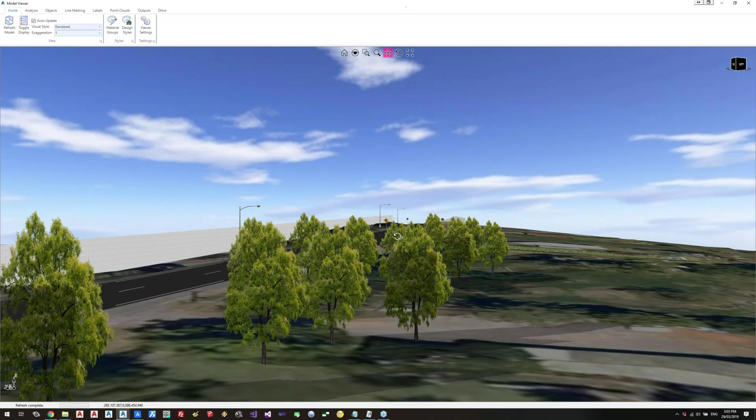Excellent. Yeah, I suppose for anybody into Star Wars or anything like that, you could just put a space background. You can do what you want within reason, I suppose. The one time I was at your office, I saw a big picture of you in the background. Yeah, that's right, I don't know what that was about. I'm joking, no, well, it's good.

We've got some really interesting questions coming in actually. Steve has asked whether or not there will be a native export for 3D objects to bring from BricsCAD into Model Viewer. He's put DAE, I'm not too sure if it's a .DAE format. No, I'm not 100% sure on that, Andrew, but maybe you might be able to expand further.

Yeah, there's actually a number of different 3D object types that we could expose pretty quickly, but we just haven't yet. There's a whole bunch of step files, which I think are what IFC essentially uses. There's a whole list, we've really just got to go through and hook them up. Some of them aren't that difficult.

As I said in the webcast yesterday, you will see more regular updates throughout the year, and as those updates come, you will see us begin to support more types of objects. So when you go to import object, this list will get longer, definitely. The one I'm excited about is IFC, but we'll have a lot more different object types in there, as long as we have access. Some might be a bit harder, like SketchUp, probably very hard for us to do. Some of the Autodesk ones might be a bit difficult too, but certainly the open source 3D objects, we'll be looking to add those.

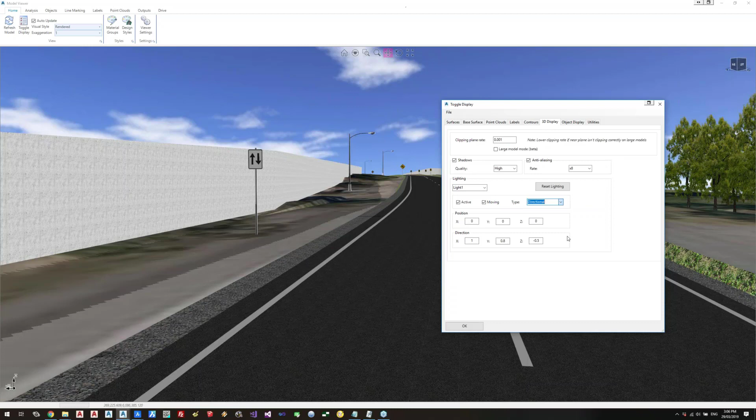We've got a question here regarding LAS files. I'm not too sure of the exact question, but I think the overall question is asking whether there are options for scaling the point cloud file. No, not at this stage. The only option we have is shifting of it.

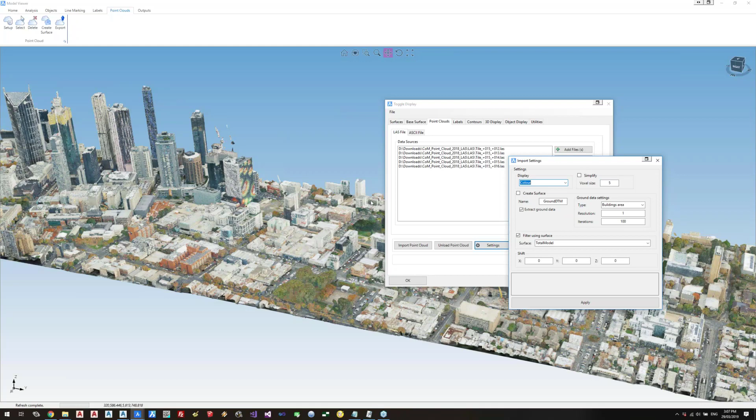But I guess at this point we're assuming that you've probably prepared the point cloud using another product, maybe Recap or some Trimble software, and you've prepared the point cloud, scaled it, and whatever. Once it's all the way you want, then you're using this purely as a viewer.

Then really the last question here is in regards to displaying the pipes in Model Viewer, and whether or not there are ways of customizing the pit types, maybe showing OSD tanks and head walls.

So at this stage, we're just displaying a cube and a cylinder. We spent a few months deciding that what we'd do, in regards to objects, is rebuild a huge sign library. That visualization pack is made up of hundreds of signs, and we've created 3D versions of them.

I guess the next step will be to start working on 3D objects for pits and things like that. And because we have this position class, we'll be able to dynamically position those pits where you've located the pit, with some added controls around that.

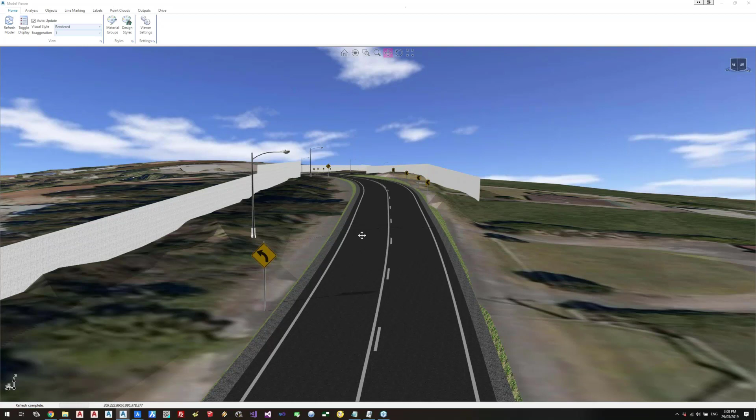Certainly, because our vision's BIM and IFC, we'll allow users in a future update to position an actual object. So maybe you've modelled a pit with a lintel and all of that, and you want to see it exactly how it will be built in 3D. That will be the next step. At the moment, we're just putting a basic cube or cylinder in, but the next step for us will be to actually build all those models now that our signage library's done.

That's it on the question front, unless anybody else has got anything else they want to quickly add in.